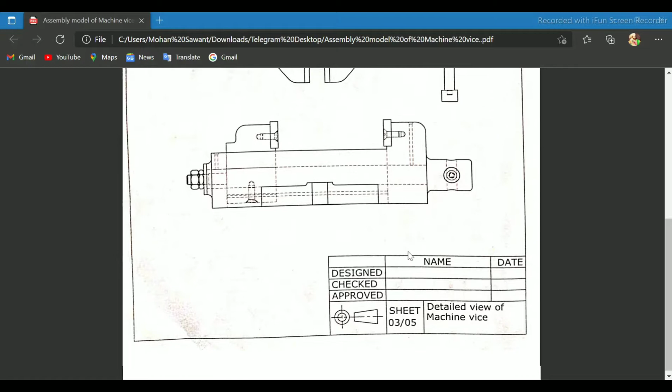You can see the sketch of the 2D drawing of our assembly, that is the detail view of the machine vise. In this video I will show you how to assemble all 11 components that I covered in my last two videos. So let's start.

Go to file. This time take assembly instead of part. Select assembly, click OK.

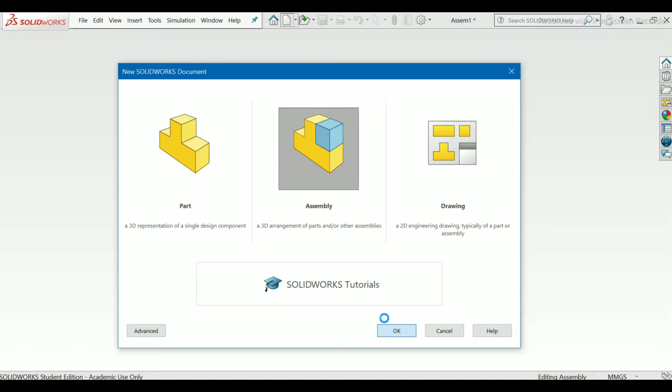It takes some time to open it. So our assembly window has been opened. It automatically selects all the components that I have created.

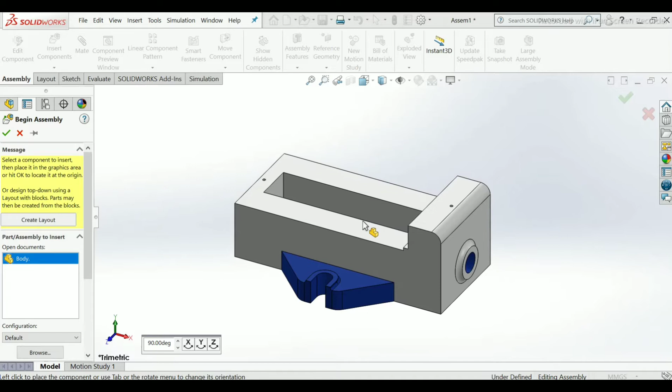So first take the body, open. Our body has come, so please place it anywhere. The first body will be fixed, it will not move. You can rotate it only. See, like this.

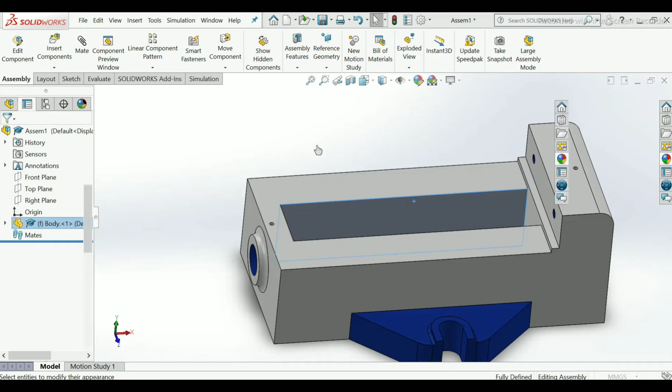I am giving some appearances on this. You can do this also in assembly. Okay.

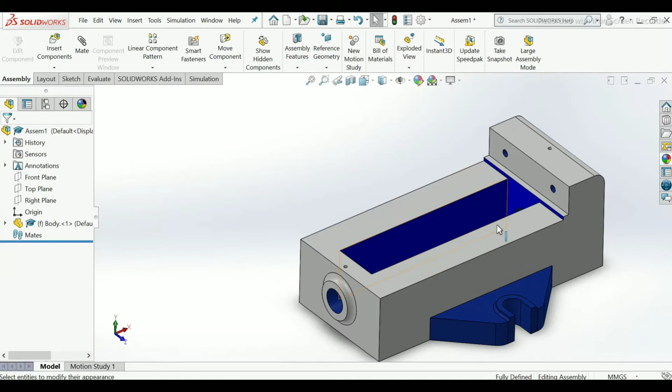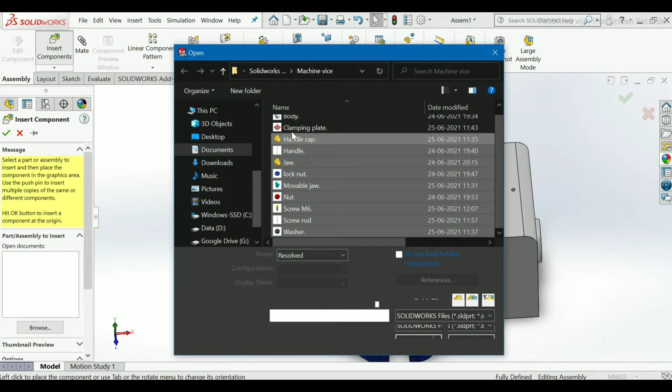So now select another component. Go to assembly, insert. Take all components if you want by clicking control, press the control button. Open. It will select automatically one by one, so that we can easily assemble all the components we have selected.

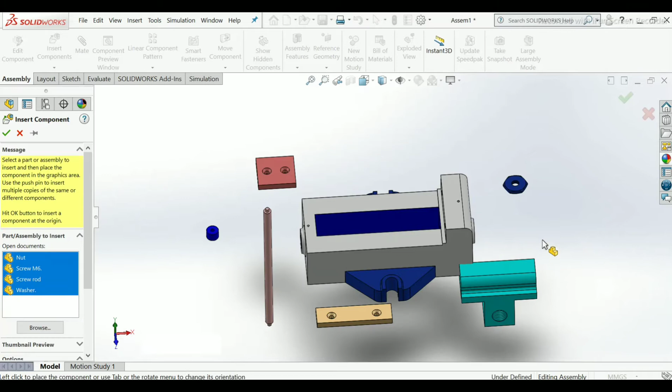You can see the preview of it. You can change the color if you want.

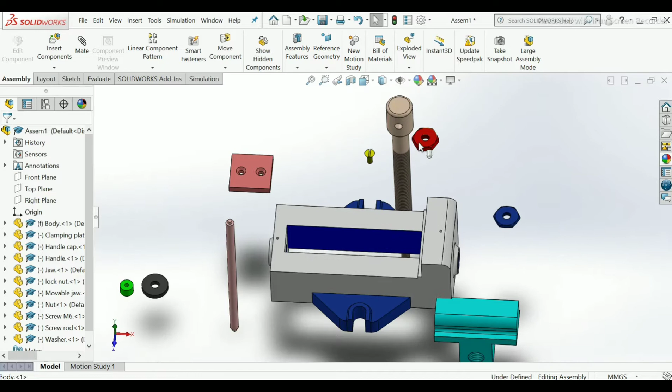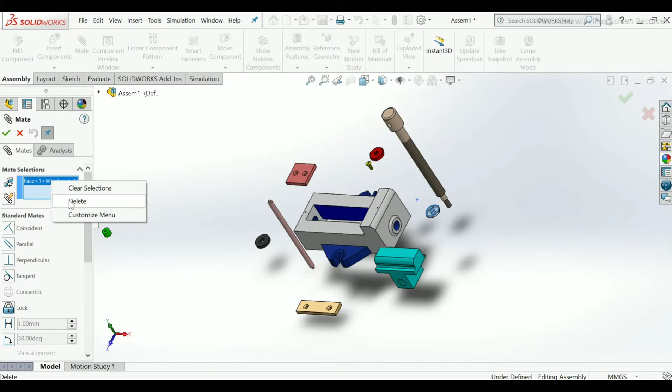Now first take the screw rod to insert here. I will choose go to mate. Select this face and this hole. Click OK.

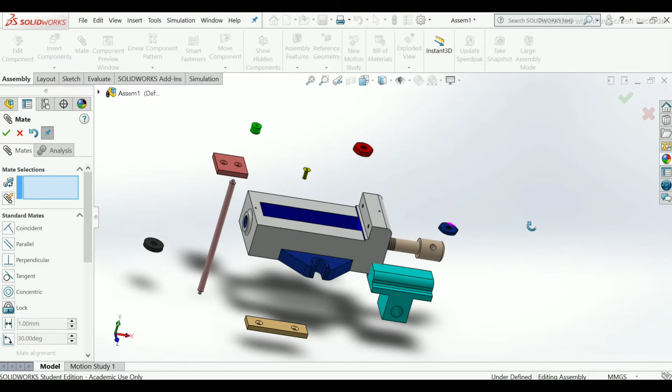Now drag this part here. Now select this face and this face. Add finish mate.

Now this part is inserted here. You can drag it far away so that we can easily apply our assembly.

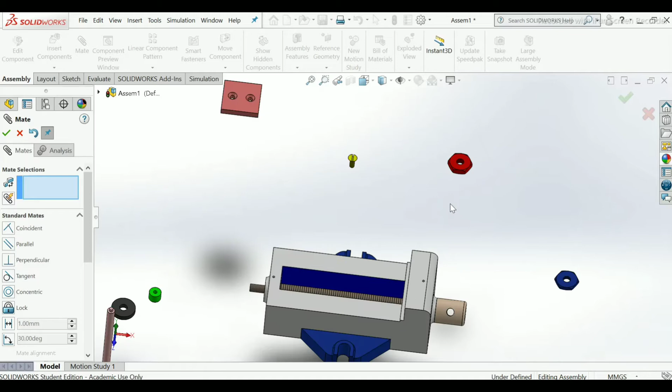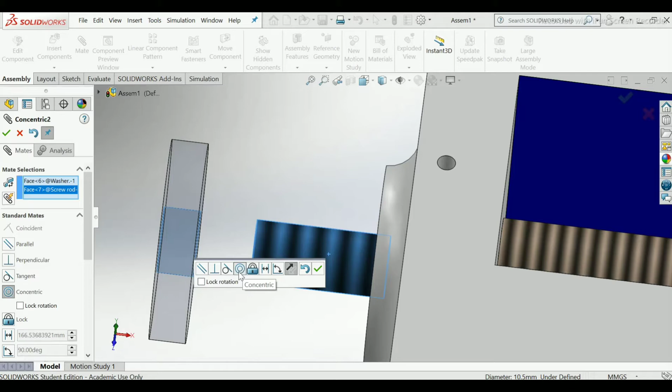So our next component will be the washer. Select this extrude cut face and select this end part of our screw rod. The relation will be concentric, as you can see. Add finish mate.

Now select this face and this face. Click add finish mate. Now this component has been fixed here. In this we have to use our nuts.

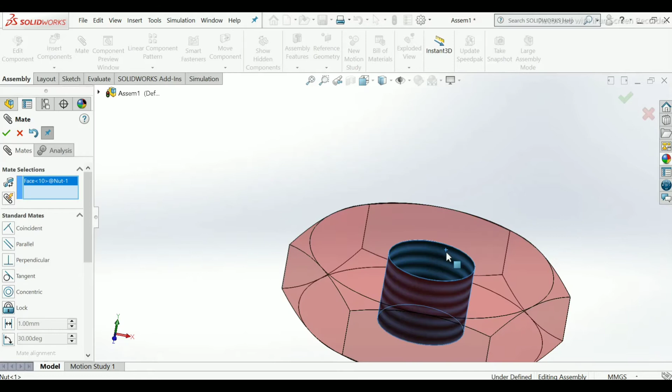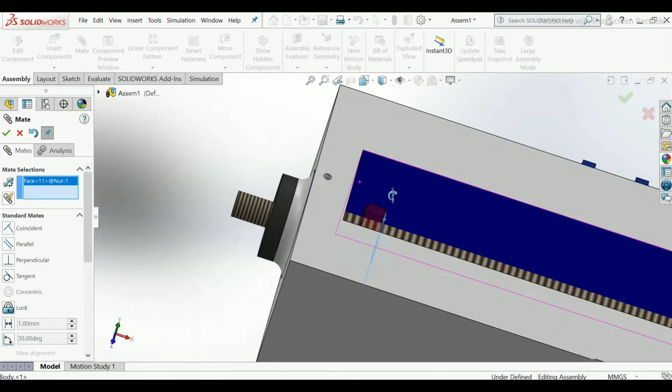So select this extrude cut hole and this face. Okay, it goes here. We want this to be here, so I will choose this face of the nut and this face of the washer. Make the relation coincident. Add finish.

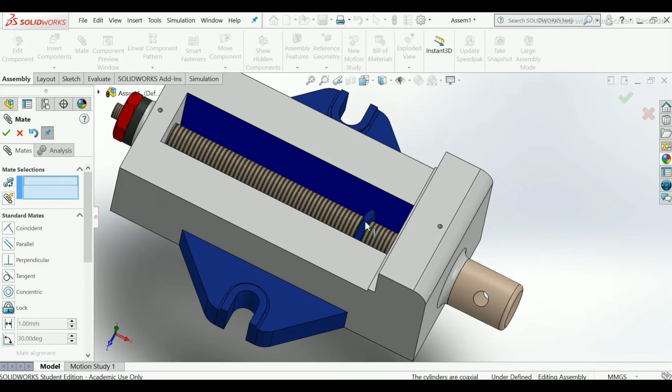Now both of these are underdefined. Click OK. You can see here minus signs come up. It means these are underdefined, or you can say in a floating condition.

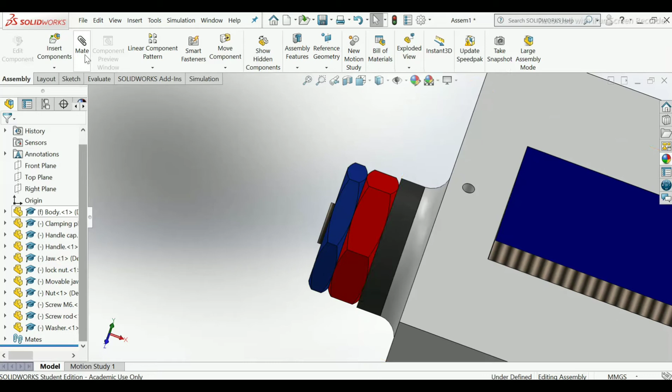To make both these parts fixed, what we will do is use mate again. Select this face and this body vise face.

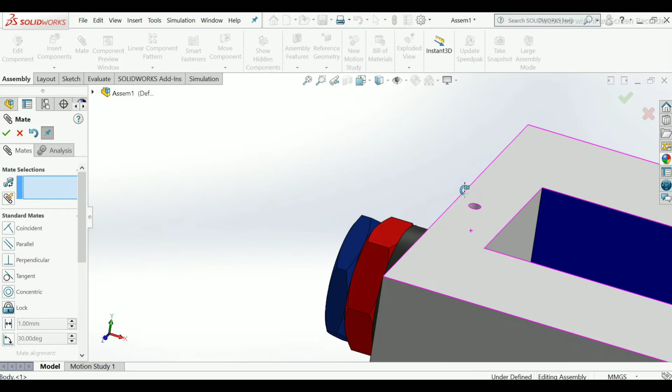Take the relation as parallel. Click OK. And again select this face and this face. Same as before, parallel. OK.

Now both our nuts are fully defined. You can see the minus sign has gone here. Only a minus sign will remain at this part, because it has a constant motion, so it comes as negative sign only. Positive sign means it is fully fixed. We can only rotate it, not move it.

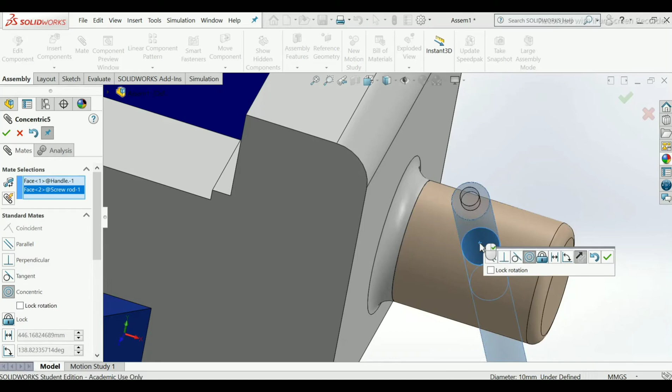Select this face and this hole. Apply concentric. OK. Drag this component so that it will look nice.

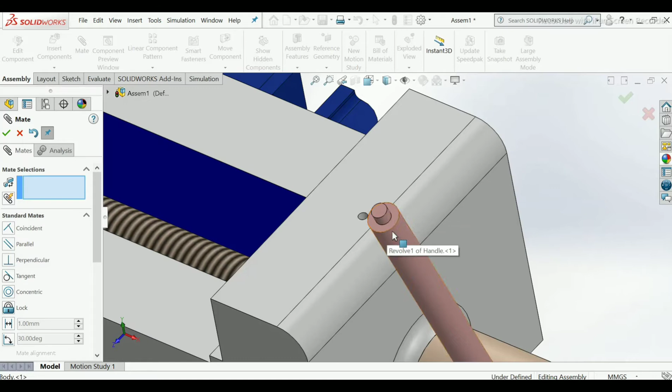Now here we want end caps, so our handle cap is here. Select this inner side face, and here will be the outer. Actually we have chosen it wrongly, so drag this component and choose this revolve face.

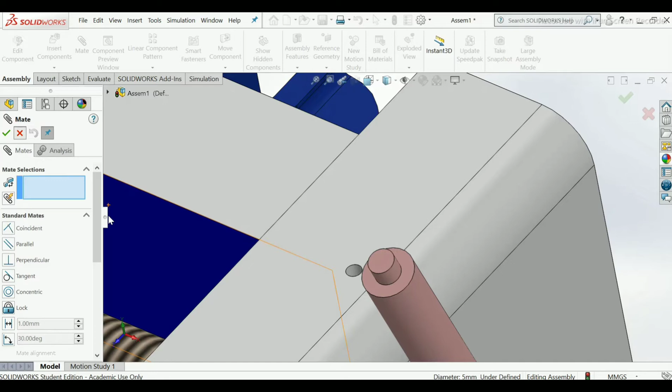Now our concentric has been made properly. Only flip the direction. OK.

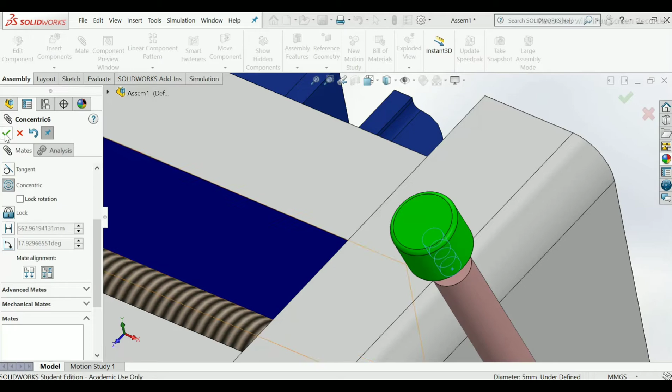Now select this face and this face. Click OK. Drag this component, so you can add here also this handle cap at the end of this portion.

So press CTRL and click this component. But first click on OK.

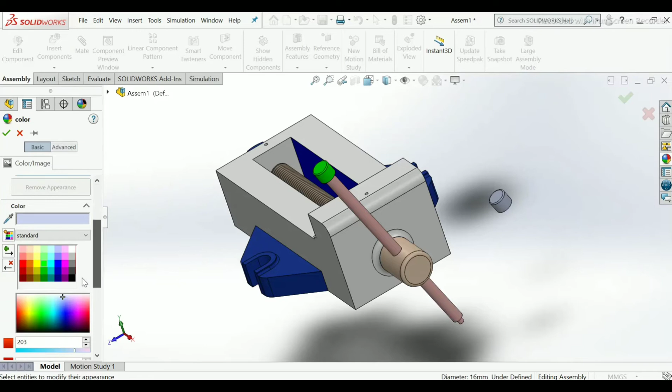Apply mate here. Choose this extrude cut face and this face. Make it aligned. OK.

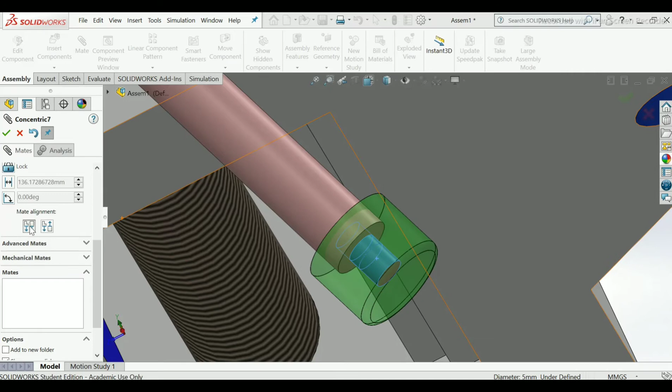Drag this. Select this face and this face. Make it concentric. Click OK.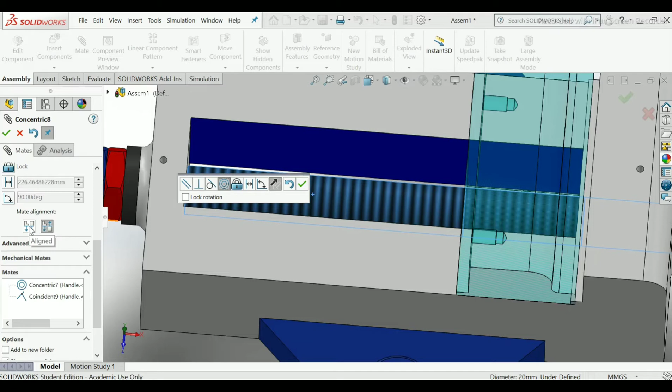Now we have to place our jaw here in this center. Select this face and this face, and align it properly.

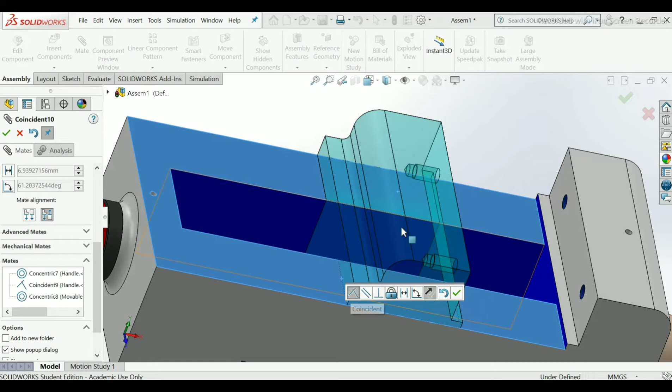Now select this face and this. Only you have to choose the face so that we can easily assemble all the components. Click coincident. Okay, so this component has been placed properly.

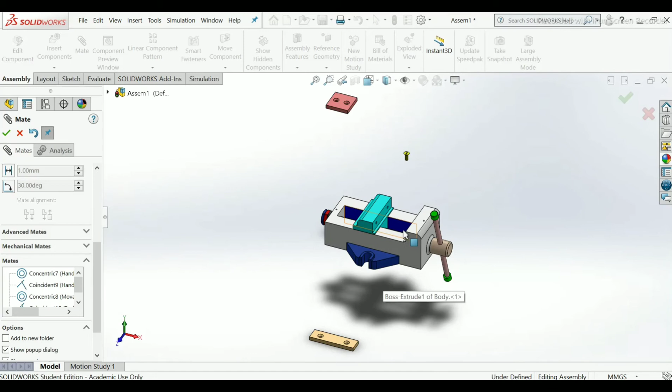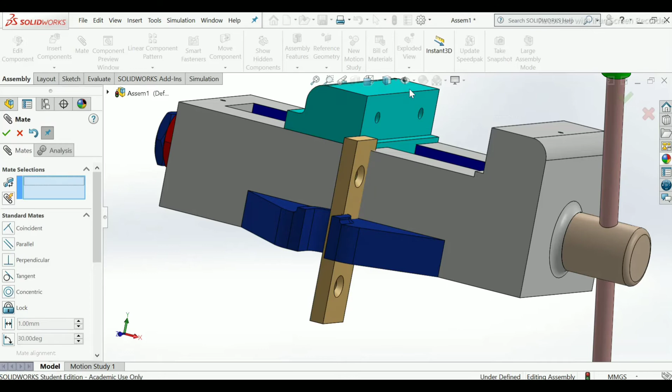Now we have to add a jaw here. Choose this face and this. Select this face and this.

Now we have to make it horizontal, so click this face and this face, make it coincident. Select this and this, make it concentric. Okay.

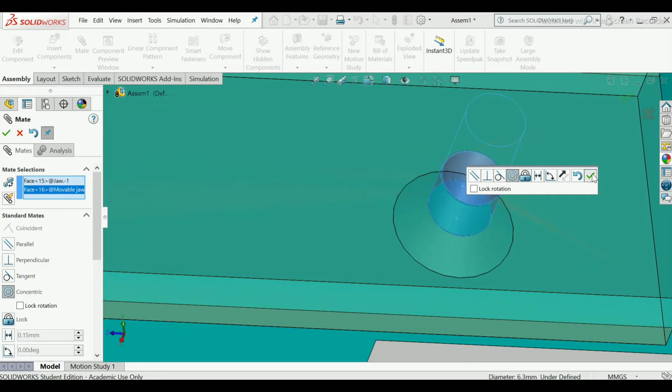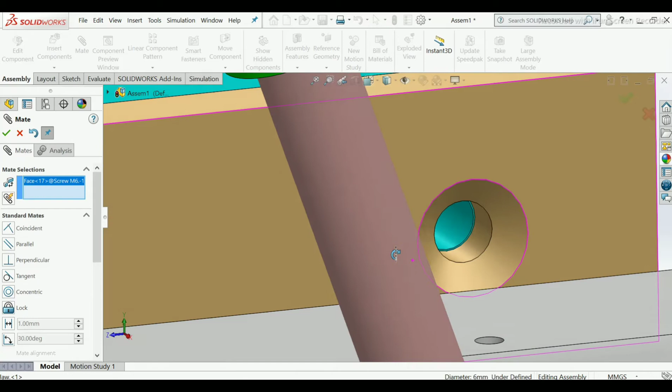Now here we are going to place our screw here. Choose this face of the screw to here. Change its direction by using mate alignment. Actually it goes outside, so click OK. Drag this component to outside.

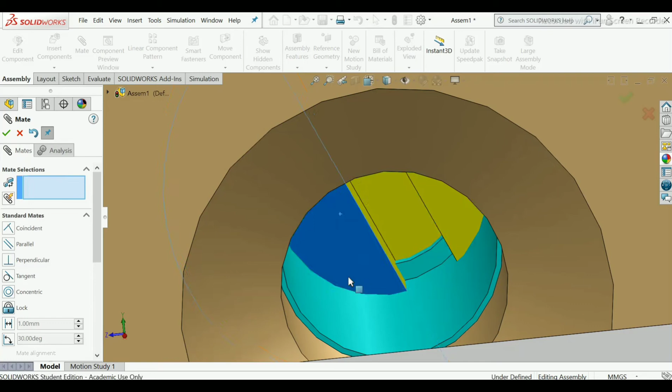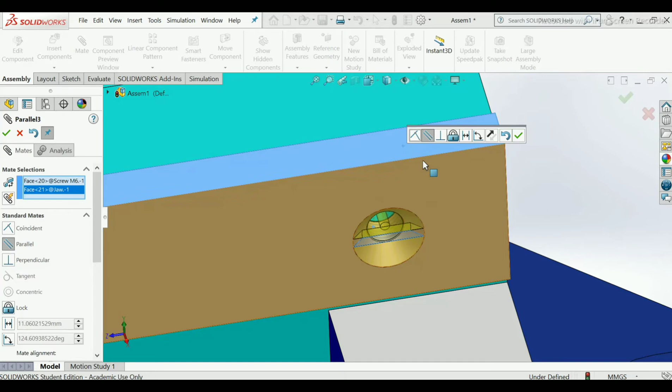Now we have to fix on this, so click this face and this face, make here relation coincident. Click OK. Now select this face and this face so that it will fix it properly here. Make it parallel, finish it. Click OK. Now our screw has been fully defined.

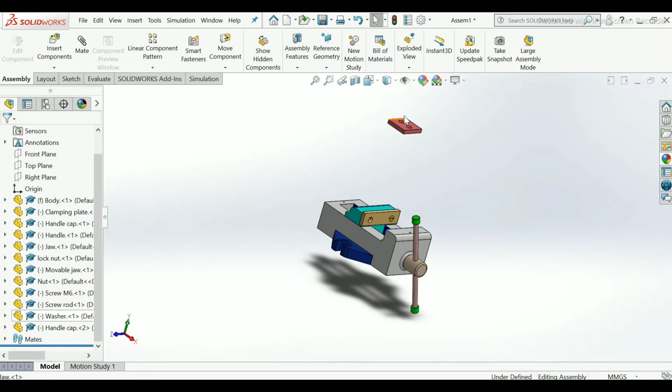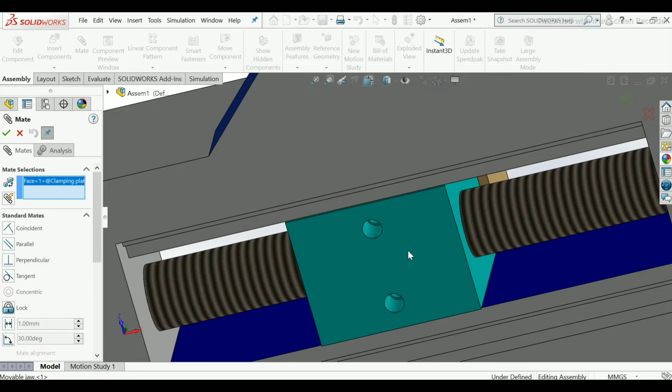Now our last component is this, that is the jaw moving plate. So go to mate again, select this face and this face. Okay.

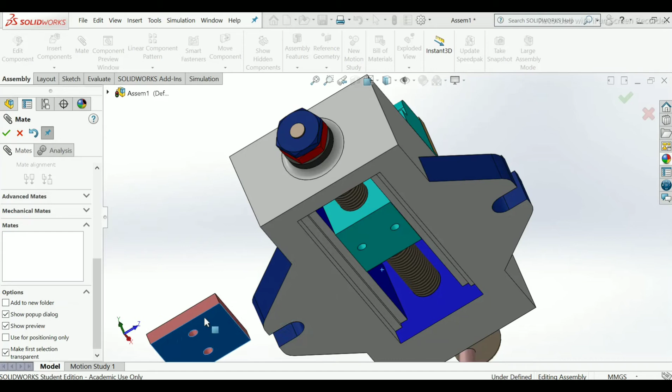Actually I have wrongly placed it, so delete this mate. Select this and this face, change its direction. Okay.

Now go to this extrude cut face and this face, make it a concentric relation. Click OK.

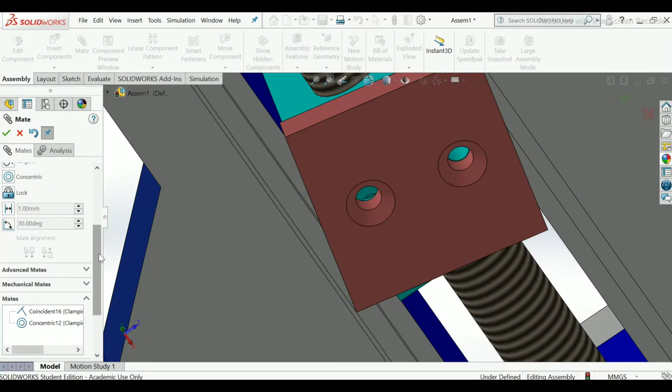Now apply this face and this face so that it will make a concentric relation. Click OK.

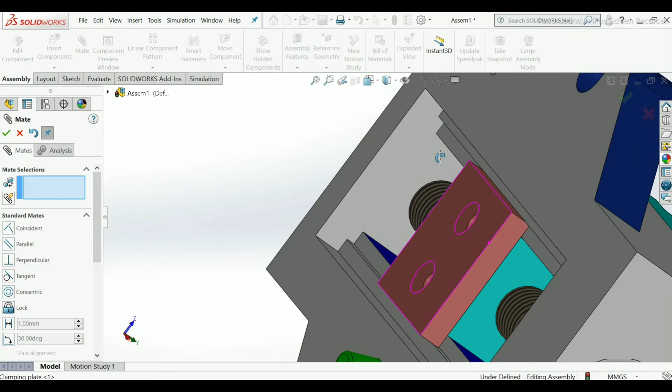Now select this face and this face, make it coincident, so click OK. Now this part has been fully placed.

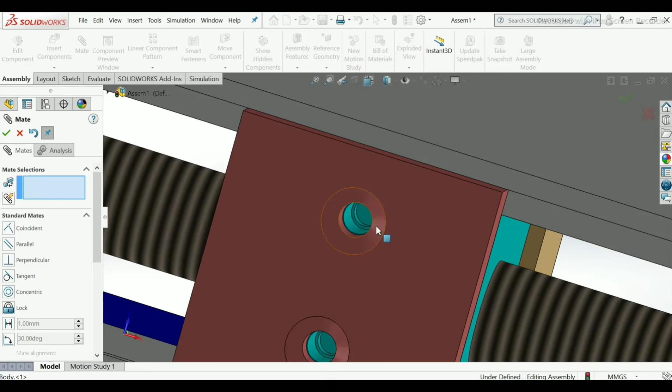Only we have to apply screws here and here also, but first we have to add here another jaw. So exit this mate command, press control button, control plus left click. I will show you.

See, our other jaw has been placed here. Then press control again and select this screw by clicking left click. I will show you that also.

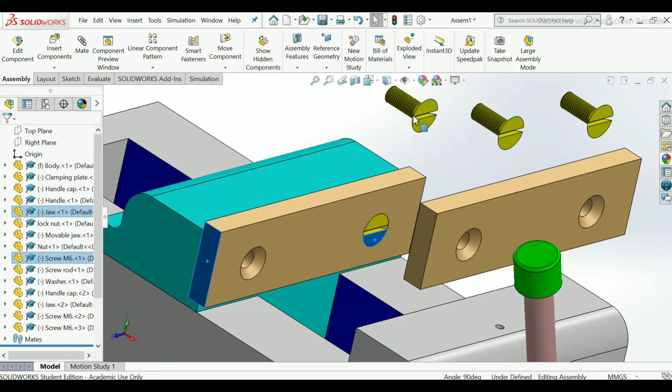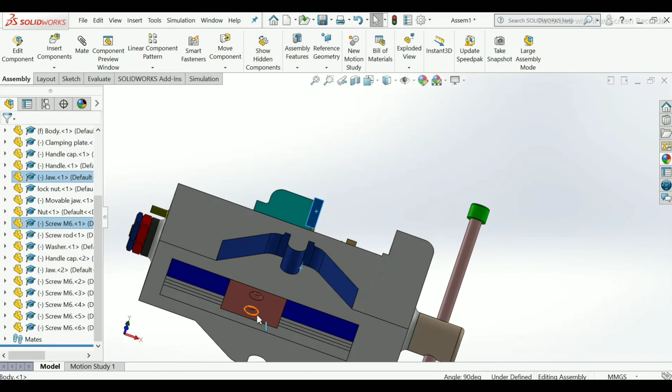I have taken 5 screws because we have to place them here and here at the bottom. So first add some relations by clicking on mate.

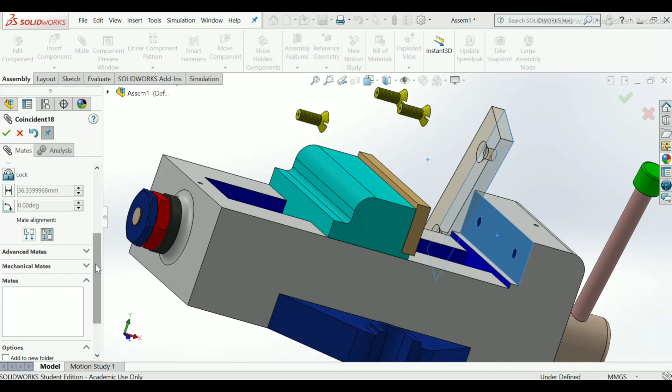Select this face and this. Make alignment anti-aligned. OK.

Now choose this extrude cut face to this face. OK.

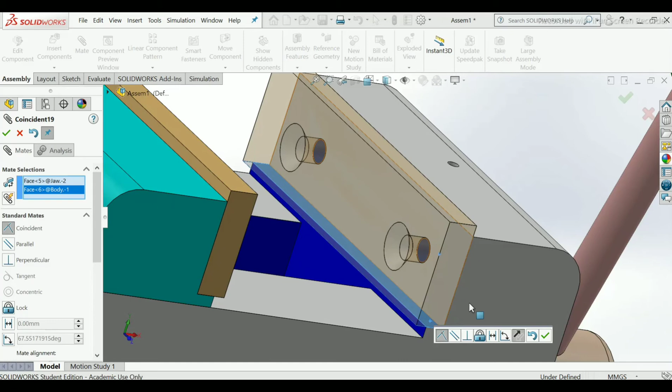Now select this bottom face and this upper face so that it will be properly fixed here. OK.

Now select this face and this, apply concentric. OK. Now our jaw has been properly fixed here.

So place here screws, select this and this face, change its direction choosing aligned, click OK.

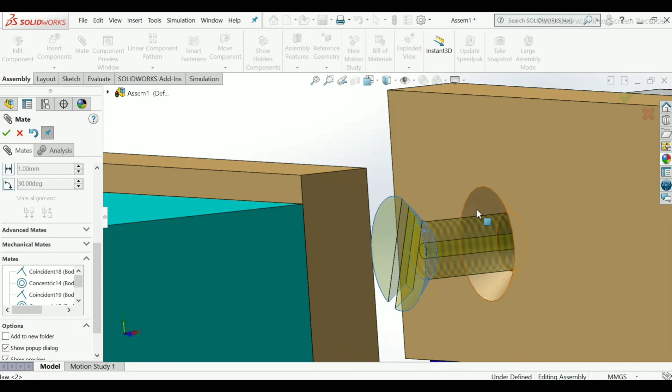Drag this component to our side, select this face and this face, make coincident relation, click OK.

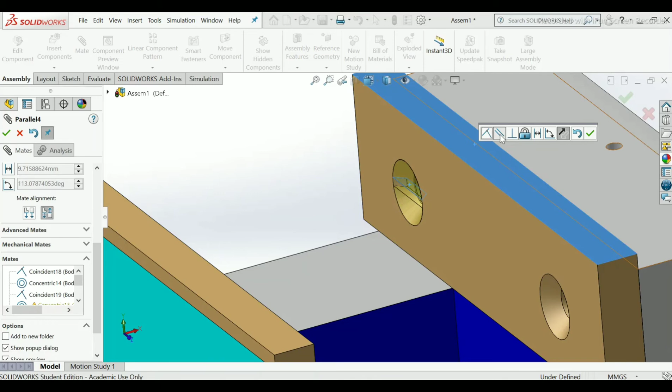Now to fix this, click this and this. It shows parallel, so make it parallel, click OK.

We have to place it on this board on the sides. As you can see, the empty space here and here.

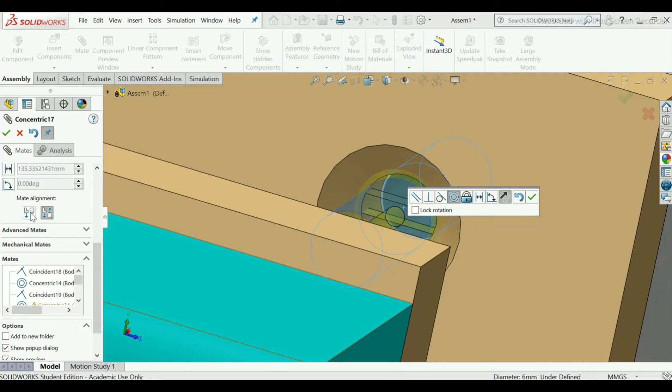So select this and this hole wizard hole, make it aligned. Okay.

Drag this component to our side, select this and this, so that it will make a coincident relation. Okay.

Select this face, the inner side where we have made a cut, and select this face, the top face of the movable jaw, make it parallel. Okay.

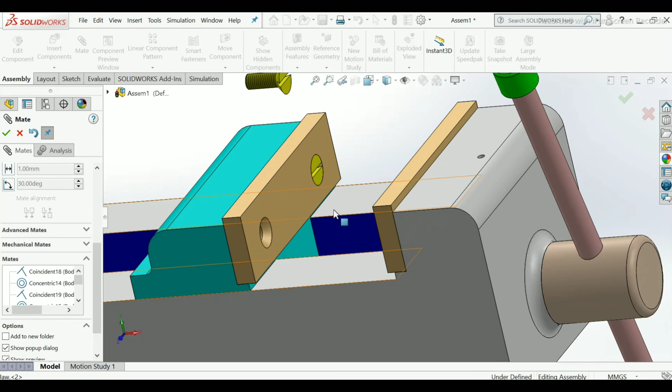Now we have 3 screws remaining. First one we have to place here, so click this face and this inner side hole, make it coincident, same as it is.

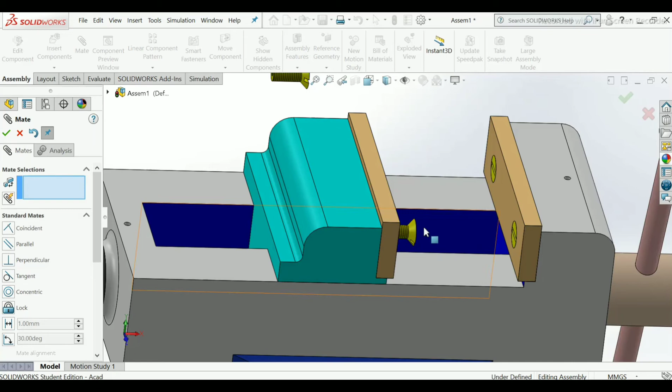Select this face and this, make it coincident.

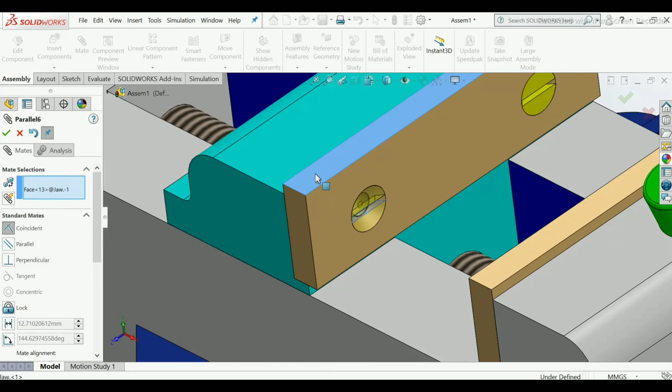Select this face and this face, make it parallel, click OK.

Now our last part, we have to place this screw on the bottom side of our assembly here.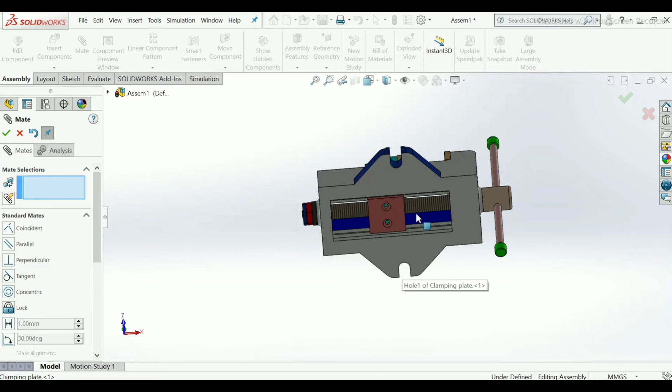So select this face and this face. Okay. Actually it goes inside, so I will do Ctrl Z.

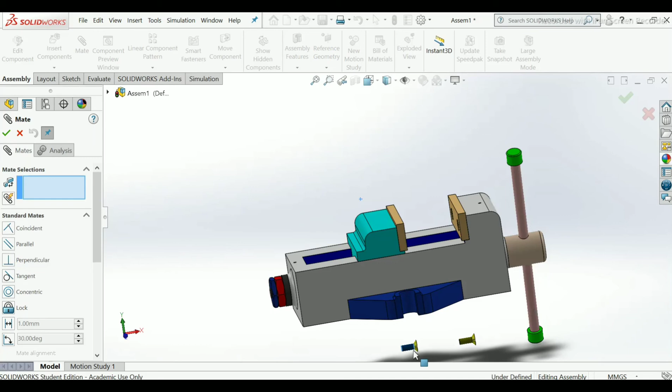Drag this component downward so that it will be easily seen here. Now select this face to this face, make it aligned properly.

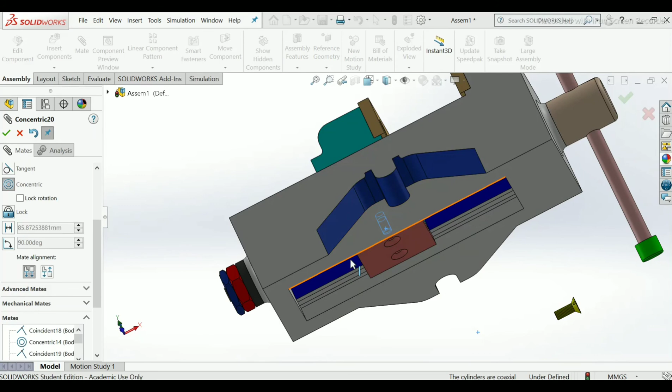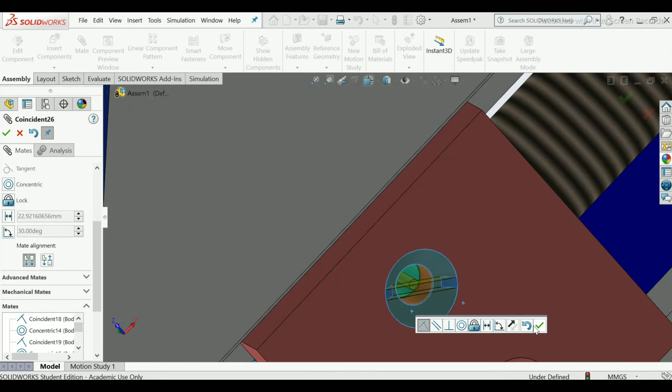Okay, drag this component, select this face and this face, make it coincident, click OK.

Now select here this face, to this face, make it parallel relation as it is, click OK.

Select this face and this face, make it concentric. Sorry, Ctrl Z.

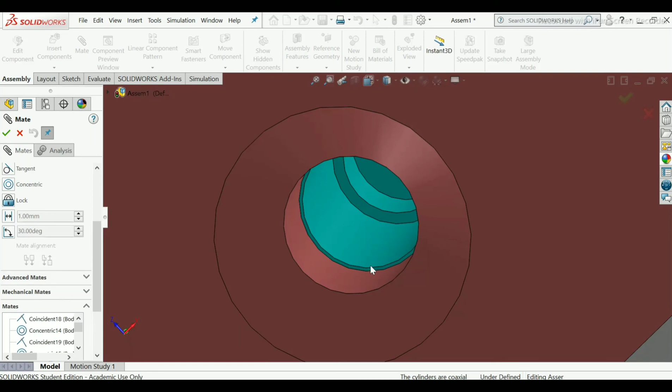Select this and this, make proper align. Okay.

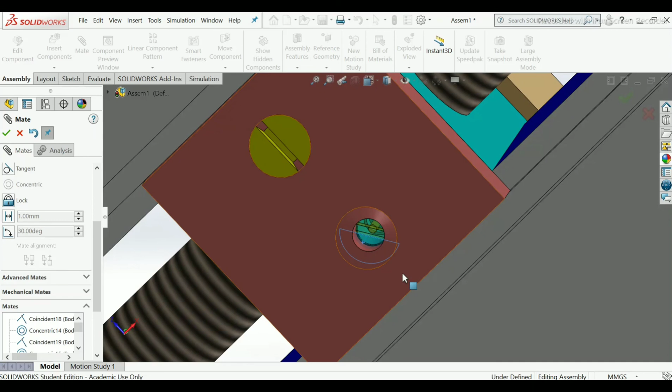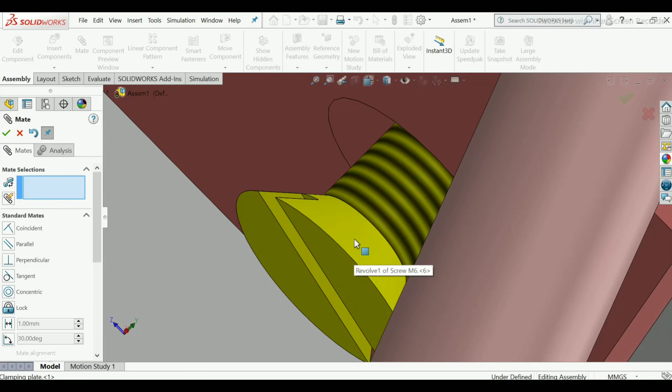Drag this component. Choose this face and this. Make it coincident. Click OK.

Now select this face and this face, same as it is, make parallel. OK.

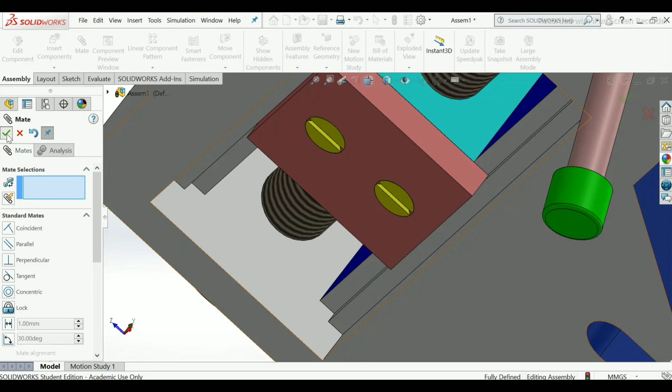Now our assembly has been completed. You can see if you want to fix this component also, you can fix it.

So choose this face and this, add your standard relation. I will choose coincident. Dimension will be 45 mm. Click OK.

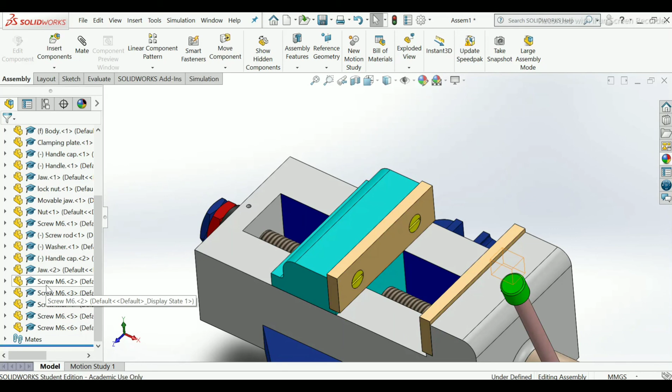So now all our screws are fully defined. You can see there is no minus sign here. Our assembly has been completed.

You can change the background of it by using Edit Appearances, click plane, show perspective by clicking view setting, perspective. OK.